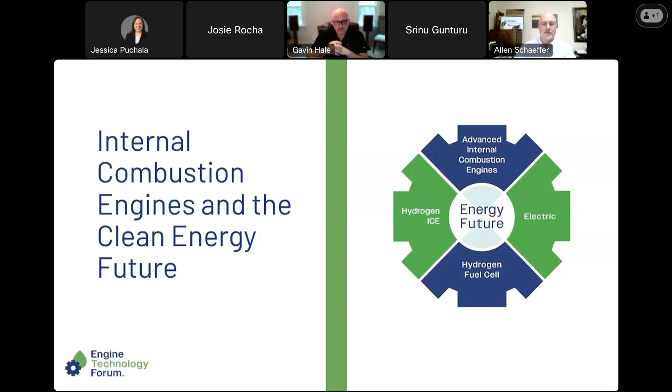I'd like to just set up our session here quickly and talk a little bit about how we see internal combustion engines and how they fit in the clean energy future. And we do see that they fit actually quite well.

I think everyone on this event is no doubt familiar with the great diversity of engines that serve our society today in any variety of purposes, whether it's goods movement, delivering things to our grocery stores and all of our needs by highway or rail, boats and barges by marine application. Agriculture, construction, industrial, and power generation uses all really rely on internal combustion engines.

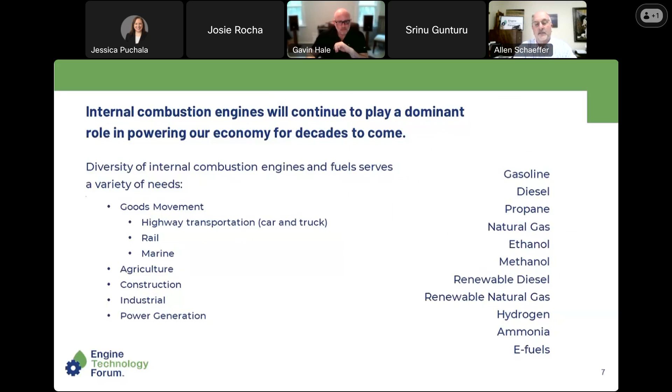And those engines run on a wide variety of different kinds of fuels today, and that list might be even expanding for tomorrow. But one of those fuels is of our particular interest today, and that's propane.

As we see the world today, the energy and climate challenges we have before us really are quite complex, and there's not going to be a silver bullet, not a single solution that's going to work for everything, everywhere, all the time. That's what makes internal combustion engines continue to be very important in our society. With that, those engines and the technology underlying them need to continue to evolve to make the engines more efficient, lower in emissions, and able to help us achieve those decarbonization objectives that everyone is working towards.

So that takes us to where we see the future for internal combustion engines. With that, I'd like to turn it over to Gav Hale to get us started with a broad look at propane. Gav, thank you for being with us today, and we look forward to your presentation.

Not a problem at all. I can see I'm the presenter and my little arrows thing is lit up at the top, so it looks like I'm in control. So thanks for the opportunity to talk to you all today. I've got quite a bit of material to go through, but it's graphical, and I'd like to move as quickly as possible to allow Stanadyne the appropriate amount of time.

But it seemed appropriate to talk about the fuel and the infrastructure and how propane serves today, to level set around that, because without that understanding, it just becomes almost like an isolated technology. So the mechanism, infrastructure, and value prop around propane today, leaning towards renewable propane, some examples of the current engine technology today, a brief overview of some of the segments, and then a lean into how we're reacting to the tightening limits, particularly associated with greenhouse gas and phase 3 limits that have been ruled by the EPA. So that's the general logic.

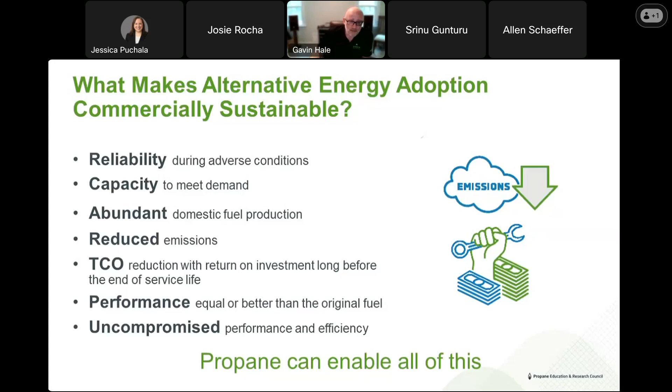in production today. So about propane, it's a US product. It's all made here in the US, 100% of it. And out of the total quantity of propane produced today, approximately 30% of that gets used domestically. The balance gets exported either into South America or over to Europe. So 100% US produced and used by, this isn't an all-encompassing answer, but it gives you an idea.

48 million homes in the US rely on propane for their heating and energy sources today, predominantly in places which are distant from the grid or natural gas pipeline infrastructure. 900,000 farms rely on propane for grain drying, for power generation, for irrigation and water management.

600,000 forklifts use propane today all over the US. Propane gives a capability to give you great stamina through the working shift, but also to work indoors and outdoors. Huge market for us, and 30,000 school buses.

That's a conservative number because where we struggle is we know production volumes, but what stays in service is sometimes difficult for us to see. So that number is probably somewhere between 30 and 40,000. And propane is a good source of energy for school buses because you achieve massively lower emissions versus diesel. You deal with particulate matter and you do it at a reasonable cost, particularly versus electrified solutions.

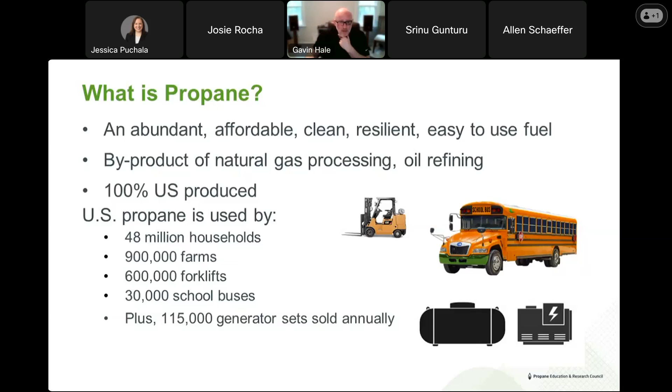So advantages, this is exciting stuff. When you think about the chemistry of propane, what does that mean to an end user? What can it give them? Well, its specific gravity is 1.52. What does that mean? Heavier than air.

So if you're servicing a propane powered vehicle in a workshop, the gas doesn't rise to the ceiling if it leaks, creating an issue with lighting. It sinks to the floor and there's a chance to evacuate through windows and doors. So if you've got a workshop today where you can service, maintain or build diesel or gasoline powered vehicles, you can move straight into propane without any additional infrastructure safety issues with that building, other than obviously needing to get trained on how to do it.

So the heating value is 84,900 British thermal units. I do like that, so less than gasoline and diesel. That's the trade-off, there's less energy in propane than diesel, but with the right engine optimized correctly in connection with this octane number of 105. Think about your regular pump gas at Citgo or wherever, that's 87 octane. Propane runs at 105. So what does that mean? Well, you can run the engine with a more aggressive ignition timing, which compensates for some of the lower calorific value.

Limits of flammability: if it's lower than 2.4% or higher than 9.5% gas to air mixture, it's actually really difficult to ignite. I'm not going to say or recommend anybody try it, but it's difficult to ignite. So it's a safe fuel. And when we store propane, it's kept in a liquid form at 100 psi at 60 degrees. So it's easy to store, easy to transport, versus other solutions like CNG and hydrogen.

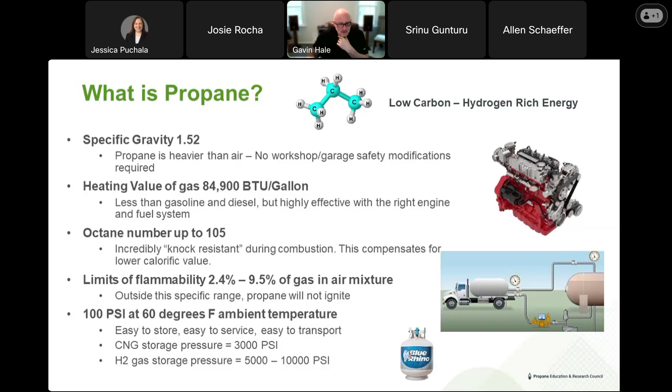How do you buy it? There's multiple different ways. There's actually now closer to 4,000 distributors of propane throughout the US, from large companies with multiple outlets to mom and pop shops that serve maybe some of the farm territories, particularly in the Midwest. Either way, it's easy to get hold of.

There's 20 locations within 7 miles of here. That's actually New Orleans, so downtown New Orleans has 20 places you can get propane. And a percentage of those are also able to refill a vehicle tank through our autogas network. So there's a good infrastructure that's already in place.

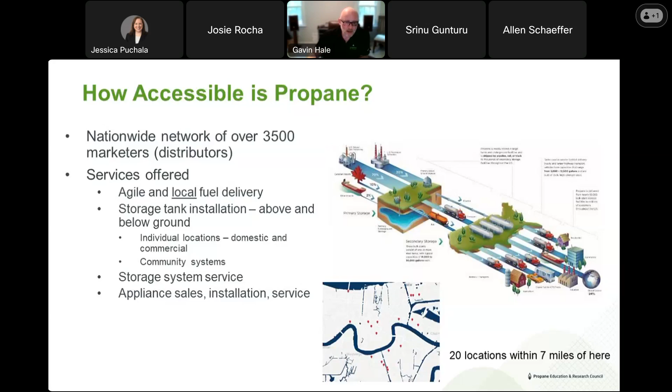If you're running propane in a vehicle, this is the current status of filling stations in the US. Where we tend to grow is different from Europe, where you've got a lot of passenger cars with this fuel - here there's a lot of school buses, a lot of delivery vehicles that do a return to base. So some of those filling stations would actually be customer locations, so there's probably way more than what's on the map. But on this map, these are places where you could go with your truck to fill up with propane.

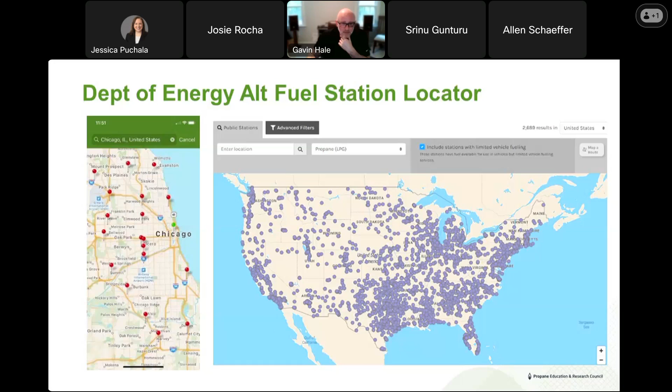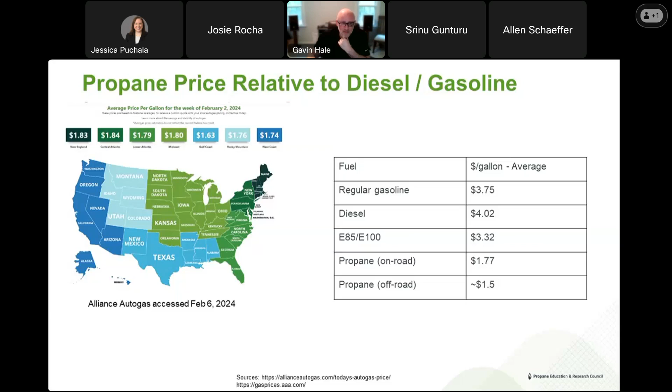Propane currently is a fossil fuel that comes from the production of oil and gas. It's almost a waste product, and that's why we have so much of it. But we're also, through the Education and Research Council, helping companies invest in methods to develop and produce renewable propane. Renewable propane in this context can come from waste stock, used cooking oil, general waste products, or increasingly the viability of non-food crops to develop this.

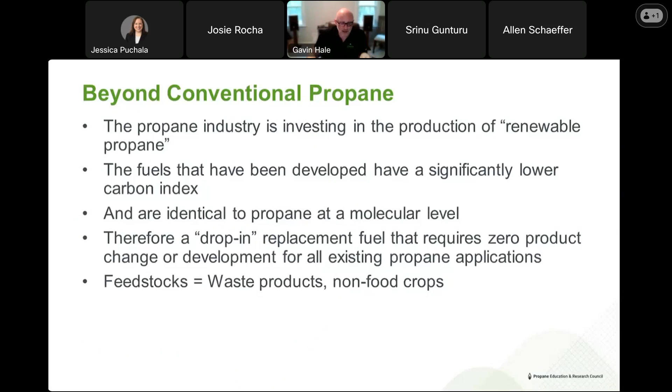The benefit of a non-food crop is you can be really honest about its carbon intensity, because when you use a waste product, what was the heritage of that waste product? What does it take to turn it into a renewable product, and what was the penalty there in terms of emissions? With a non-food feedstock, you kind of avoid that. So renewable propane is absolutely molecularly identical to the fossil fuel version - any engine or vehicle you're running today with standard propane, renewable propane will work.

This is one potential feedstock, camelina. It's basically a weed - it grows in drought conditions, wet conditions, and its yield of oil for each one of these nodules is incredibly high. So this is a crop that's being sponsored globally for renewable propane production, and it grows really well here in the US.

If you look at the carbon intensity of renewable propane - conventional propane is about 78 grams of CO2 per megajoule, renewable can be as low as 7. In fact, camelina is down towards that 7 rather than the upper end, which includes waste product. And if you look at the carbon intensity of the various states, we're significantly better even with conventional propane than the majority of states in the US right now.

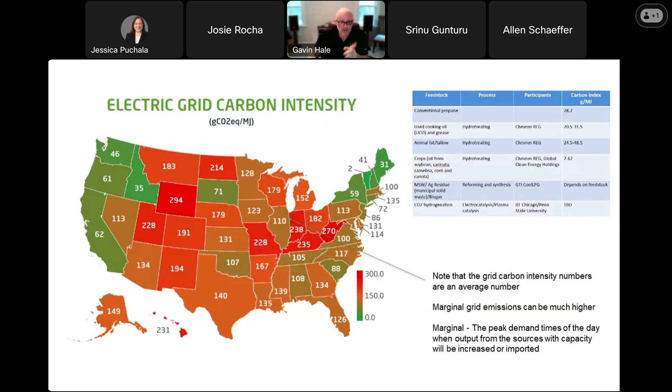Remember, this is an average statement, not a marginal one. A marginal one means at times of day when a state may be capable of achieving a low figure, but when its grid is under stress, it brings in electricity from neighbouring states or uses other forms of power generation that aren't as carbon neutral. So this tends to be a big deviation - on average here we've got 35, but during the marginal condition it's probably 3 or 4 times that number. So that's something to bear in mind when you look at comparative carbon index.

Projections of renewable propane production - this is a very crude graph, but we actually achieved 4.5 million gallons in '23, probably close to double that as we go through '24, then it ramps up further, and the plan is to have the capability to meet the 10 billion gallons of what we'll call fossil propane today, matching it with the renewable variety.

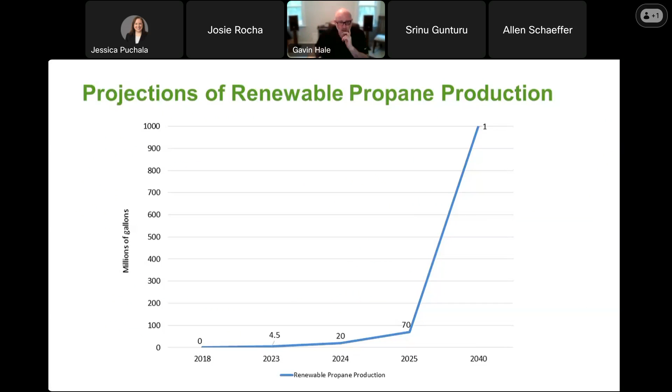So that program's on track. The challenge is to have refiners recognize propane as a viable fuel source within that renewable feedstock, because there's other products that can be made from the same feedstock. And that's PERC's job to help amplify that. So we work with the refiners to do that. So that's a little bit of background about the fuel.

Now, thinking about some of the engines that are available for both on-road and off-road, and a lean into some of the development that's taking place to make propane a really viable fuel as we go toward and through 2027 for on-road.

So the biggest opportunity for the propane industry and engine manufacturers, and the biggest opportunity for vehicle OEMs, is to find ways to address the complexity that diesel exhaust or diesel technology on-road particularly drives in terms of an exhaust after treatment and emissions limits. So from 2027, you get a combination of the conventional EPA regulations, but then greenhouse gas phase 3, which I've not gone into in any real detail here, but we've put a lot of work into what our approach is to that. And it really makes diesel a very, very difficult fuel, close to being non-viable for many on-road segments as we go closer from 27 through to 2030, which is the period of time where phase 3 is implemented. So vehicle OEMs are now actively seeking alternatives to diesel. So that's the opportunity for them. They get to reduce emissions with a fuel that's available and retain most of the design content of the truck, which is key because a lot of other alternative energy sources mean a big tear up for the OEMs.

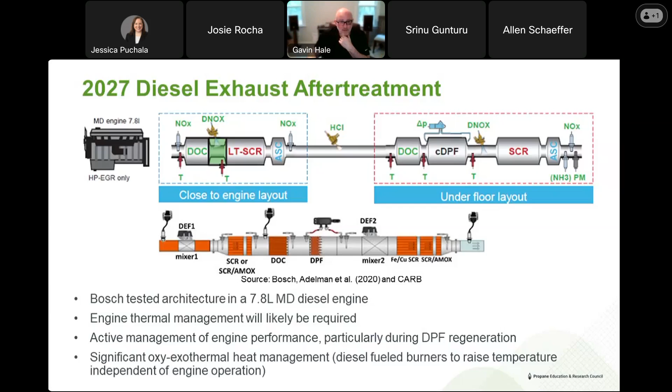With propane, today, all you need is a 3-way catalytic converter, similar to the ones that you have on your car today. For 2027 regulations, probably 2 catalytic converters, close coupled under the floor if it's a truck. As we move into phase 3 greenhouse gas limits and our journey to 2032, then this really stays the key recipe, with potentially the addition of some SCR in the exhaust after treatment. But that depends on the balance of technology that we're able to deploy in cylinder to drive the best efficiency in the engine, rather than relying on the after treatment to catch everything. So that's a balancing act that we've got.

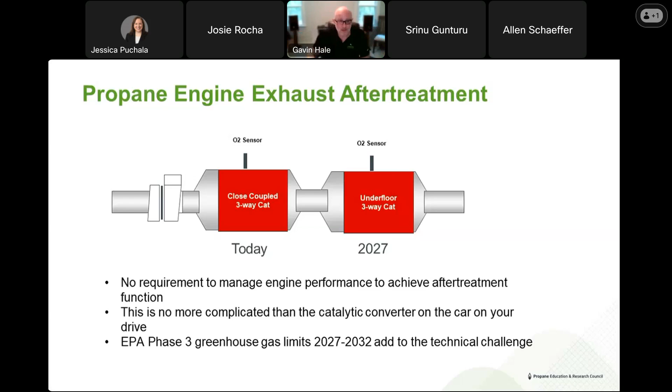And when we look at some of the options that are available to us, this is a relatively active program, and I suggest it's probably a pathway forwards in some shape or form. But this is to take propane to a compression ignition solution, we have viable work underway right now to do that. It then becomes an action of commercializing, but the engine manufacturers will love this because it's low technology, simple change to the engine, almost a drop into an existing engine design, maintain your existing supply chain, maintain your existing manufacturing processes, exceed emissions limits. And it is this sort of technology that takes us to efficiency that's equal to diesel.

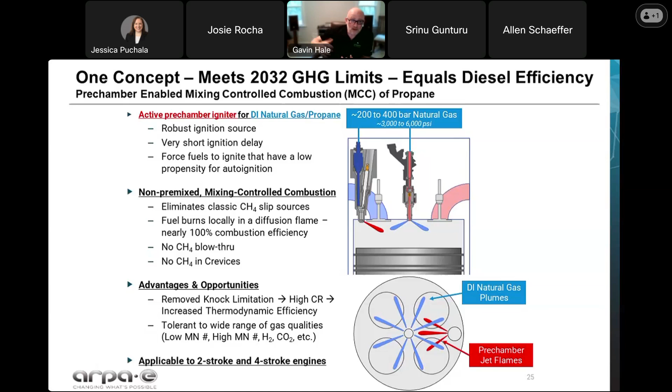When you combine this with forced induction, supercharger, for sure, we will have to have supercharger option on some of the engines that we've got. We've got one that's got that, or turbocharging. So this is a game changer. This takes propane into a completely new dimension, because historically we've had to work with engine manufacturers that are a flavour of automotive. As we have to journey to meet the greenhouse gas limits, that brings in new technology like this. There's two major engine manufacturers that we're talking to at the moment about this, and a demonstration engine is already running. So this isn't science fiction, it's the economic delivery of science fact.

So we dealt with the emissions. What's the impact on the vehicle? So for a CNG, compressed natural gas solution, huge tank, a lot of money, weighs a lot. Propane tank, because of the 100 PSI limit and the safe nature of the fuel, it's a $4,000 tank. So much smaller, much more compact tank. So we're meeting the emissions. We've got renewable propane that's coming, easy to integrate from a vehicle aspect to a fuel system, and it's a mature solution. So think of the school buses, the delivery vehicles that have solutions like this already in place.

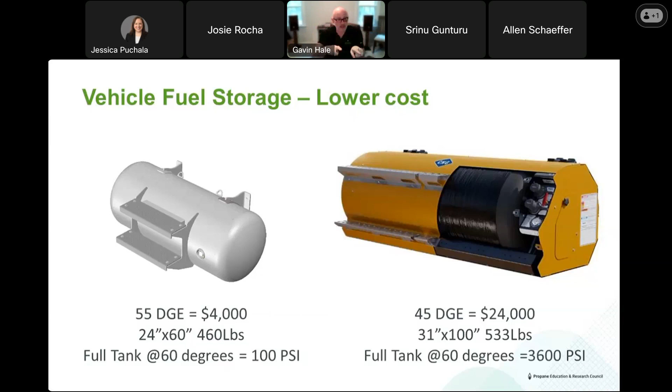It's not rocket science. What is rocket science is when we develop an agricultural tractor version of the engine I was talking about - where do you put the fuel? That's always the elephant in the room. So we're investing in conformal fuel tank designs that would enable a propane tank to occupy a similar space to what is a diesel or gasoline tank today.

Filling up with fuel, what's the infrastructure implications? I said it was a simple thing to do, but here's an example of a school bus refilling tank, a particularly large one for a large school with a large fleet. That installation - safety barriers, tank, electricity supply and canopy - was $175,000 for the whole thing, installed by one of our propane retailers with a fuel supply contract.

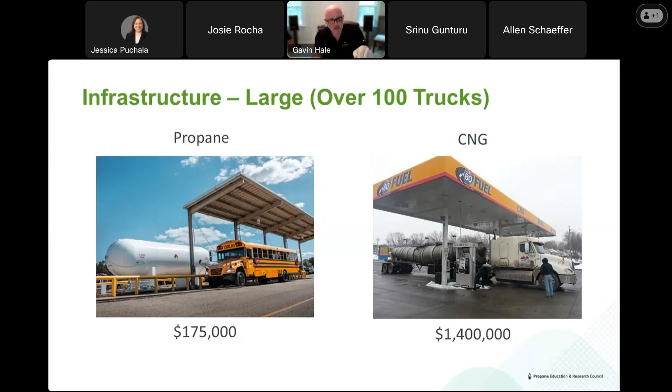The equivalent for CNG is a different ballpark altogether. So we've got the emissions, the renewable elements coming in, the fuel system's easy to integrate with the vehicle, advancing technology, and a way to get the fuel from our marketer, a point of source, to a vehicle very, very cheaply. Refilling with propane is no more difficult than diesel, really.

Maintenance facilities, we've kind of talked about that. Zero investment. If you build things today with internal combustion, if you fix them and maintain them or store them in a garage, you need to do nothing. The codes and standards that exist around propane are identical, as opposed to significant investment, say for a service bay, for a compressed natural gas solution. So easy adoption from a servicing standpoint, and the technology is way simpler than diesel.

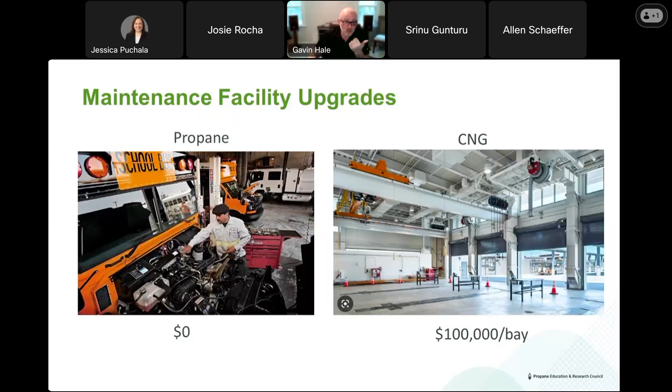We've seen some of that. In terms of segments, I'm picking the pace up now because I can't take too much time. We said power generation, material handling, on-road and off-road, and here's some examples of those technologies. So Caterpillar with the forklift trucks, a company called MAFI that makes terminal tractors for the ports. That's a huge market.

The ports have wholesale adopted propane, backing off electrification, amplifying propane. Not in every case, but certainly the large container ports need 24/7, 100% availability. Recharging isn't an option, so that industry is moving massively to propane. School buses are already there. Power generation - think about the simple exhaust solution, trying to package that in a portable genset. Propane does that very well.

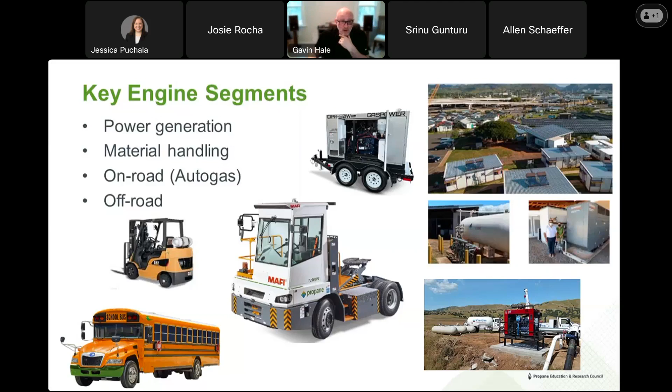Buses, we talked briefly about that. There's some paratransit type applications and some pricing, which I've got as public data, so we can share this. Gasoline solution, 71k; propane, 86; and electric, 233. And think about the savings in fuel that drive straight to your bottom line. I think by the time you've taken everything into account, it's 56 to 60 cents a mile saving, which is huge for anybody who's got a route that's delivering plenty of miles. That's a significant saving in fuel costs.

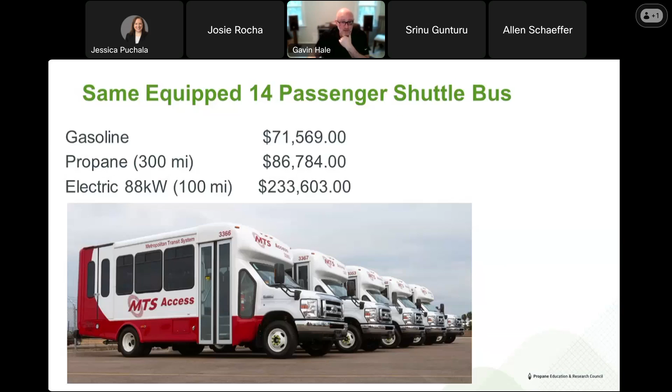In terms of existing engine offerings, I'm trying to lean back into that question asked earlier. Difficult slide to read, but this is really difficult to get on one slide. We've basically got - blue is variable speed on and off road, orange is stationary power generation. So for the majority of on-road, we need a solution. This is in kilowatts, you can compare both together because power generation is kilowatts, obviously. Our horsepower requirement - if we can deliver propane solutions between 15 and 350 horsepower, then we've got things covered. That's kind of where we sit today with the products that we've got.

So if the question is how easy is it to displace a diesel model with a propane one - broadly speaking, it can be done. The danger is you can get into a swept volume trade-off, particularly if you're thinking take a diesel out, put a propane engine in. That's where turbocharging and supercharging are absolutely mandatory. The days of the naturally aspirated propane engine are significantly limited for many sectors, and that's where we're focusing our development. So as we go through our development programs with a view to 2027, that also gives us off-road capabilities in those power nodes.

So I'm going to say simplistically, from a power standpoint, we've got it covered. Where it becomes questionable for off-road is whether the engine configuration will give you the right power takeoffs and things for customers, and that can be a challenge. So it's a case by case thing. But simplistically, from a power standpoint, we're there.

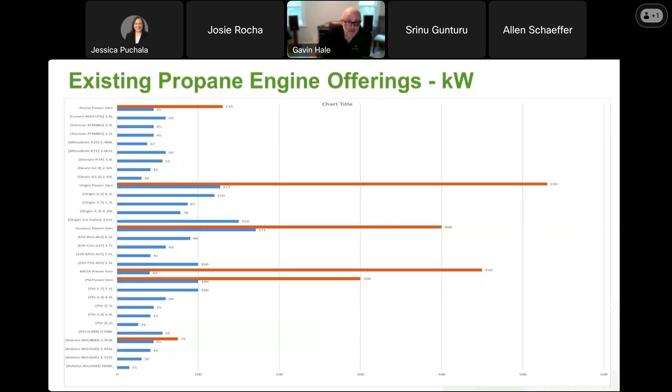EV transition, propane, and where that intersects. We're part of the wide path to emissions reduction. We don't necessarily compete with anybody because nobody can fulfill everybody's needs with whatever solution they're looking at, whether it's hydrogen, that's a long way off, EV, that's quite a long way off for many of the segments we work in, whether it's propane, diesel, or even gasoline. We're all part of the solution.

But where can propane intersect most positively with the electrical vehicle market? Weather events and climate disasters last year, 20 in total, have caused billion-dollar issues and breakdowns in the grid. Couple that with the predictive accumulation of EV population through 2030. So electrification's here, it's coming, it has traction in certain segments and it has mandates in certain segments, and the net result is that the business builds up from an EV standpoint.

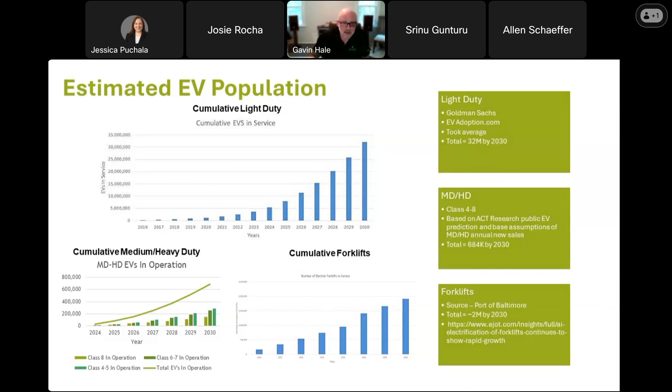How on earth does America think it's going to provide this energy? Because the grid can't do it. We know that, we've done a real detailed study on this, it just can't do it. If you've got a Class 8 charging plaza for common traffic, you're looking at the same energy as a small town at any one point in time. So how do we get that energy? Propane can be part of that solution.

So we have fledgling EV charging solutions. Technology demonstrated, now we need to scale up, and that's what we're doing.

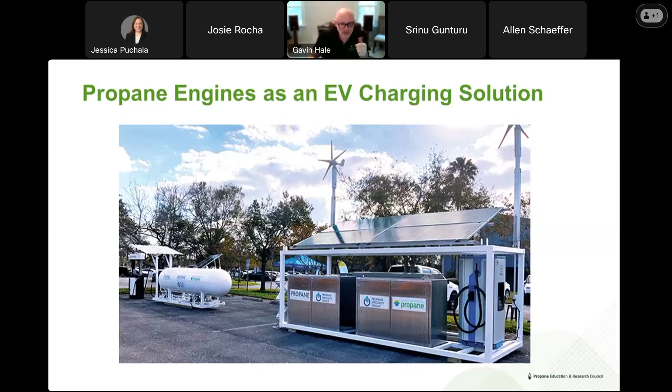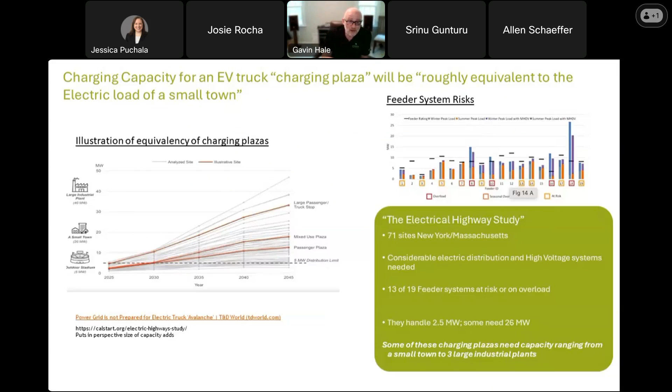How can this possibly be economical? Bearing in mind the low cost of fuel for propane, bearing in mind the renewable fuel element as well, so low carbon footprint. Think about the states with high carbon intensity and how difficult it is for them from a grid standpoint. Overlay the capacity issues, and remote charging is absolutely going to happen. Will they all be propane? No, there's other solutions, but propane enables you to bring in a low cost energy solution, particularly in places where you're remote from the grid. So even if the capacity is there, can you connect? Because the investment in interconnects is huge.

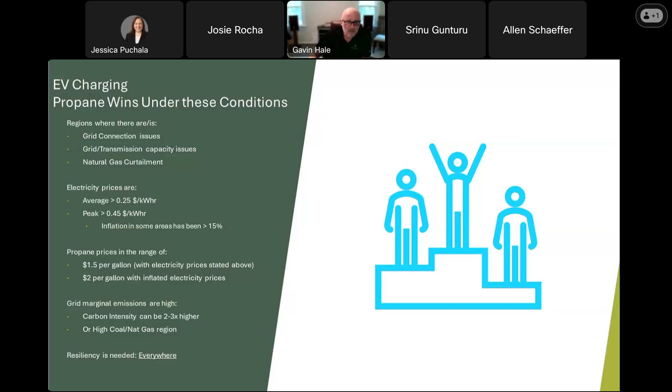Getting that message out to the OEMs is key, because we kind of own this data. It doesn't exist anywhere else. We spent quite a bit of money over 4 or 5 months pulling that together. It's kind of neat to have that algorithm. You can help people save money at the end of the day.

Engine product development. Is that leading to Eric's slide?

Yeah, it is. I had a couple of slides after that which looked to have been taken out. But where I was going with that was the existing engine participants that we have today. We're working with major engine manufacturers -- we've got Ford Products, General Motors, we've got a program with Cummins, and several other major engine manufacturers working with us on the emissions reduction work I referred to. So it's a very, very healthy time to be active in the propane space. Folks are kind of waking up to the advantages that we offer. Thanks very much for the opportunity to present that.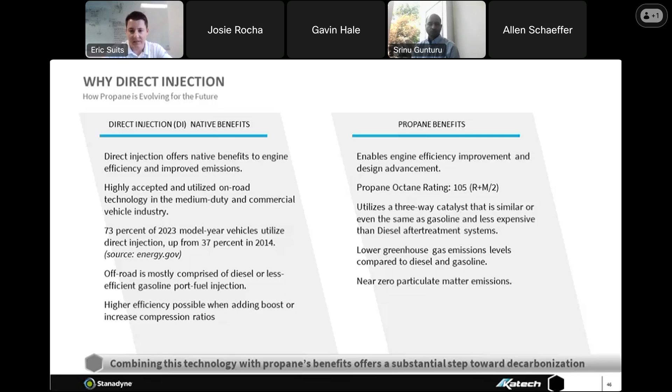But there were obviously some obstacles through the process—it's a gaseous fuel, so it's vapor and liquid depending on pressure and temperature, and it's not been a well-researched data point. There have been a few articles written here and there, but from a feasibility standpoint, no one had really looked at tackling it.

The program kicked off with a non-firing test cell where we benchmarked current OEM injectors and pumps to see what shortcomings a current GDI component would have if you tried to run it on propane. Through this time, we transitioned to a firing test cell.

We were able to benchmark an engine on gasoline and then compare it to propane—we'll cover those results in a minute. In that feedback, and seeing the shortcomings of the OEM components, we fed that back to Stanadyne and discussed what a propane-specific pump or propane-specific injector would need.

The initial scope of the program was just to benchmark OEM components, but with Stanadyne coming on board, we were able to skip a step or two ahead and get near commercialization of propane components.

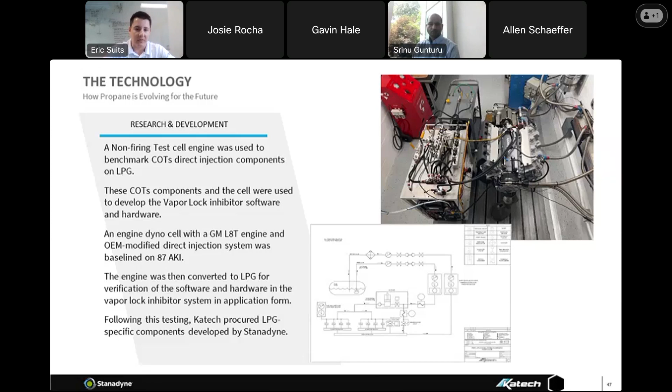As Eric mentioned on providing a solution on the fuel systems, Katech and PERC reached out to Stanadyne to help on a specific DI pump and a specific DI injector that we developed to run on the propane engine.

We took the GM L8T engine as our base engine platform to prove out this concept. In the next coming slides, we'll show that not only did we prove out the performance of the engine, we also ran durability testing up to 250 hours to prove this DI engine is promising for propane systems.

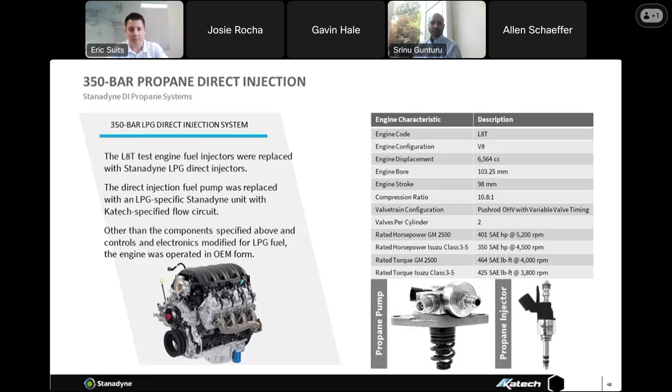Only a few hardware components were changed on the engine—just the fuel pump and injector—the engine itself was used as is. This technology can be applied to any size gasoline direct injection engine using the pump and injector, with some flow circuit changes, making it adaptable into any size GDI engine.

So from a power output standpoint, we baselined the L8T, which natively runs on 87 octane, and then reran it with propane DI and the Stanadyne components, flow updates, and engine controls. All targets were tested at a lambda of 1. That's important from an emissions standpoint, because come the 2027 regulations, enrichment during wide open throttle testing won't be allowed.

With propane, we're able to easily run at lambda 1 without EGT limits or concerns, and it lets the catalyst work as it should. Current gasoline engines will run rich at wide open throttle, which can affect emissions, and come 2027 that won't be allowed.

In addition, as Gavin mentioned, the octane rating of propane is 105, and with DI capability, there are many turbocharged DI engines and other platforms where if you increase compression or design an engine specific to propane, we'd expect to exceed the 87 octane power output even further than just meeting it, as this engine natively runs a 10.8 to 1 compression ratio.

We can go to the next slide.

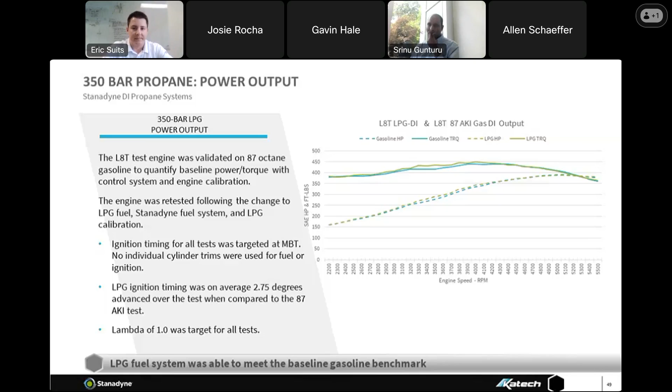At the completion of baseline engine calibration on the propane and vapor lock inhibitor components, we were able to run a 250-hour durability cycle. It was comprised of a few different test cycles, mixing off-road, on-road, EPA, and CARB test cycles. It included shutdown time, which didn't count towards running time, but allowed for hot heat soak and refueling.

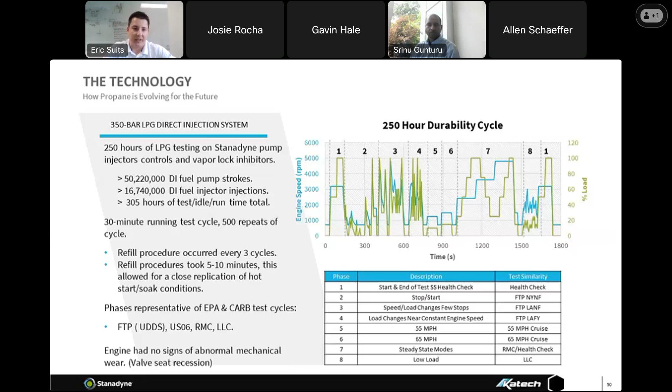All these things are important to propane, and we'll cover in the next slide the obstacles of vapor lock, which is one reason DI propane hadn't been thoroughly pursued until this time. We can go to the next slide.

Just to add to that, I know we ran the 250 hours, and everybody's wondering what happened to those components, and whether there was any wear. That's what we're going to cover in the next coming slides.

We were able to test the pumps and injectors. On the pumps, we haven't seen any change in pump performance after running for 250 hours on propane. There is some change from baseline, but that's just end of line test measurement error. There is no change in flow performance of the Stanadyne pump after running for 50 million cycles with liquid propane.

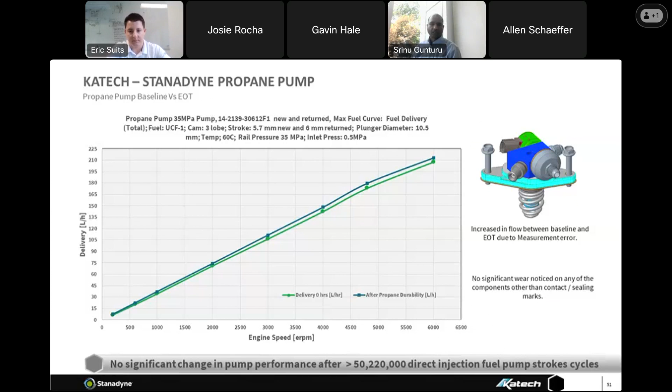Next slide. We also sectioned the pump that ran the 250 hours, and you can see there was no significant wear noticed on any of the components, other than just contact or sealing marks. We haven't seen any significant wear, even at the sealing locations.

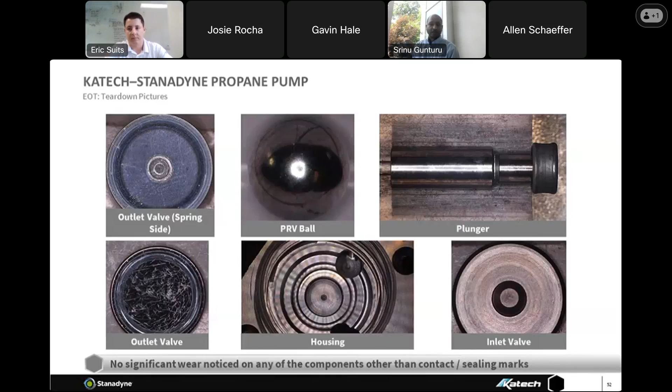No wear, no cavitation, and none of the teardown parts show any signs of degrading after running for 250 hours. Next slide.

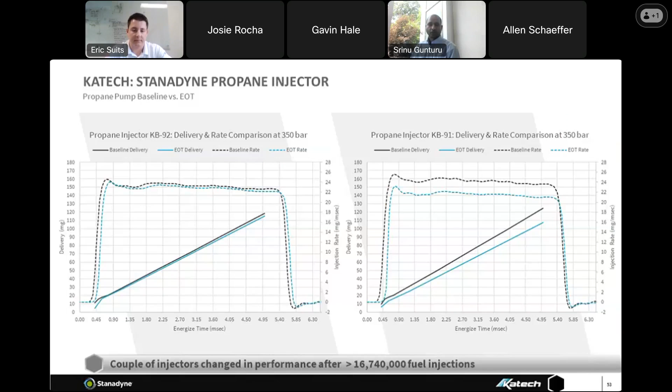We have seen some change. There were a few injectors that showed a change in performance over the 250 hours, and we saw some wear due to lift change in our injectors. We were able to identify what changed and what caused the lift change, and we put some fixes in place. If you go to the next slide.

As I mentioned, there was no significant wear on any components other than a couple, the armature and retainer, which caused a lift change due to wear. We've already implemented a design fix to address this change in lift and wear of the armature and retainer.

We're also already planning further testing, as Gavin mentioned. We're working with OEMs to prove out these permanent corrective actions on the wear, which we've already proven out on gasoline. So we just need to prove it out on liquid propane now. Next slide.

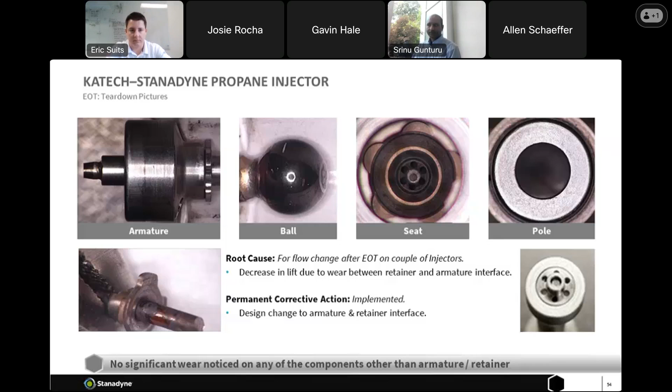So that covers the testing program through the components and the durability findings from the engine side. I breezed over it earlier, but there's no significant wear on the mechanical engine side. Often early on, for 10, 20, 30 years, the talk around propane was that you need to upgrade the valve seats because it's propane and there's no liquid going over the valves.

But modern direct injected engines account for that. The materials and technologies have advanced. So there's no valve recession, no wear on the engine side while running on propane, even in a quite stringent test profile. Some of the obstacles we went through, one key area was vapor lock inhibiting. Since propane exists as both gas and liquid, you're always trying to deliver liquid propane to the pump.

If that fuel going to the pump on its way gets heated to a certain point without a proper rise in pressure, it'll vaporize and you run into a condition of vapor lock. It happens to DI engines, it can happen to port fuel engines, and it's a common concern when dealing with propane. So one of the big projects Katech focused on with Stanadyne supplying the hardware was building a hardware and software system that delivered the propane correctly to the pump and never allowed for a vapor lock condition.

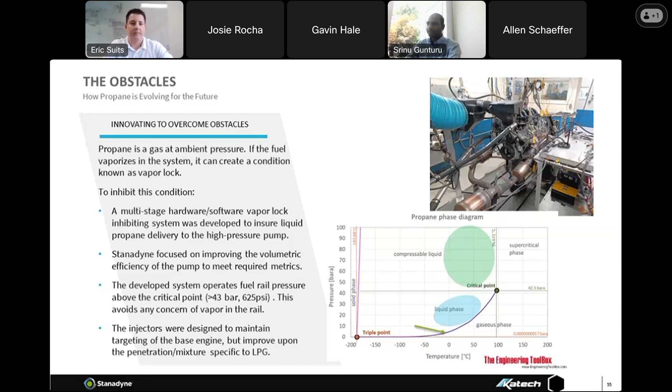As a summary and conclusion of the technology and testing over the past year or two of this development: we were able to meet and exceed the torque and performance of the baseline gasoline engine. That's check number one, we were able to meet the performance. For reliability, we were able to complete a 250-hour durability test cycle. There were notes taken away and things being addressed and updated, but the cycle was rigorous, hitting heat soak, hot shutdown, refueling, and on and off-road load points.

LPG and direct-injected emissions show promising results, especially compared to diesel. The aftertreatment system is very similar to gasoline, so there's little variance between the two, whether from an upfit perspective or a manufacturer offering both options.

Moving to the conclusions on direct injection liquid propane gas: we have a high level of efficacy and reliability based on the 250 hours of durability testing we've done so far. The Stanadyne fuel system technology is ready for commercialization for liquid propane gas direct injection engines, and the Katech developed vapor lock system solved the concerns and limitations surrounding liquid propane in direct injection technology.

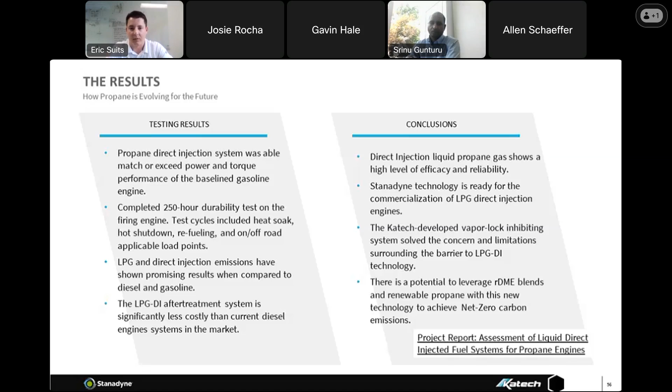Thank you both, Eric and Srinu, for that excellent presentation about this really exciting research. Let's take a look at the questions we have so far. First one, I guess this will be for you, Gav: looking at the genset segment, what is the most representative range of power there?

So for gensets, there's an upper limit, really around fuel consumption with established technology. We tend to say that anything over 400 kilowatt electrical, refueling becomes a major piece of work. You've either got huge tanks, or if it's a prime application, you're getting regular refills. So that's where it settles out. But the propane power generation market technology spread takes you from the small air-cooled Kohler products all the way up to large 22-litre V engines developing 350 kilowatts and above. So we've got most of the nodes covered, which was kind of a shock for PERC when I did a breakdown of that. The task is to get genset OEMs to recognize the fuel as more than a standby fuel and amplify the markets on the back of that. Simplistically, if you think of a node between lower single-digit kWs up to 350-400, there's a product that'll cope with it.

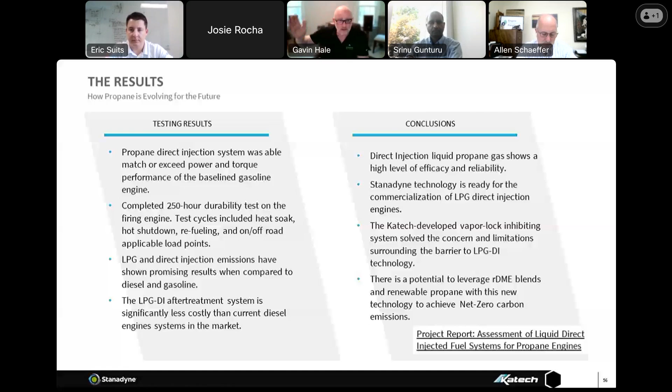So whether it's in a farm environment or warehouse environment with forklift trucks, it's established. The challenge we have is political and investor concentration on a silver bullet. People like to see things served at the rate they can scan through a mobile phone when reading the news, and it's very comforting to think there's this great thing coming that will fix everything for everybody. It cannot possibly happen.

The emissions footprint of fossil fuel propane, even not including renewable, is massively less than hydrogen today, and will remain that way for a considerable period of time. Then you get into the whole infrastructure and availability question. Same applies to methanol and ammonia. But it depends on your market.

If you're comparing the requirements of a mobile delivery service on road, versus power generation at a data center, versus energy in a construction site with a whole worksite mentality—what's the solution for the whole worksite? That's going to drive different solutions. For some of those, propane works well, and for others maybe an alternative solution works well. So as technology advances, it becomes increasingly segmented. That's natural to everything we see today. It breaks the market up, and we'll have that with fuels. We're seeing that already. But propane has an easier path to emissions reduction than most fuel sources. At the moment it doesn't get the bandwidth from a media standpoint, and that holds us back.